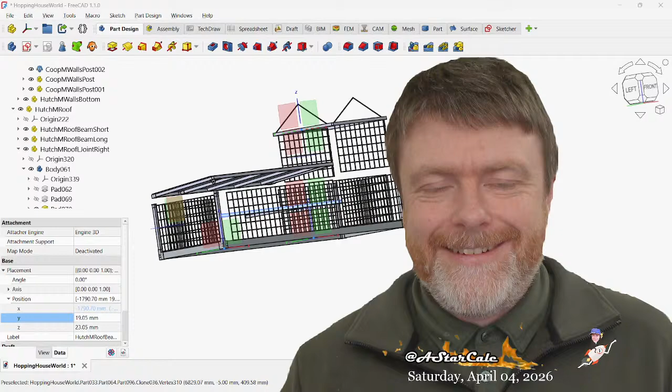My name is Cale, and we're working on some 3D printed rabbit hutches and colonies using cheap chicken coops and pet playpen fences from Amazon, with some 3D printed corners, a corrugated roof, and some wood and stuff from the Home Depot.

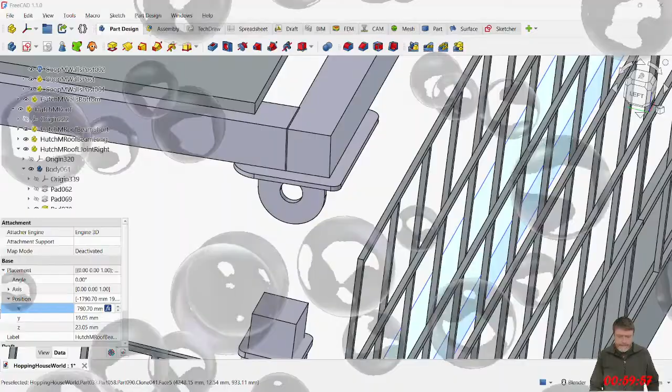All right, first off, I need to point you to where we're at. So that was not the right button. Oops.

GitHub.com/hoppinghouse/hoppinghouse world, and this is our mono repo. Doesn't really have a whole lot right now. It does have the design file, it's not all broken up yet.

Bookshelf. All right, so I need to make this thing not bozo.

So the hinge pad, I think it's right here. And then what do we need to do? Get the top down, going down, right here, right here. And then that doesn't look right. So I need to have this be... well, first the corners need to get... okay.

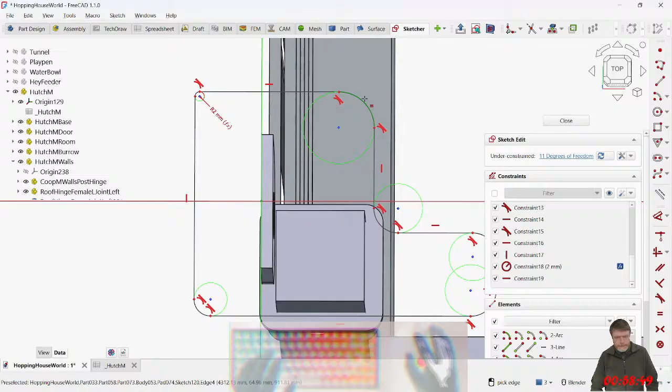Oh wait, hold on, no, I just need to do the equal. I need to move that in there for right now. Oh, get out of here.

Come on. Come on. There we go.

I don't know what to think about those new green circles. This is in FreeCAD 1.1. I don't hate them. I think it shows better what's going on, that's probably why it's there. I don't know why it's necessary though, or why it's a good idea. Maybe other CAD programs have them.

All right, sweet. So now I have to take this, this needs to be centered over here. Then I need to take this. So it's width, like a post width or something. Walls post width plus 2 times the hutch plastic wall thickness.

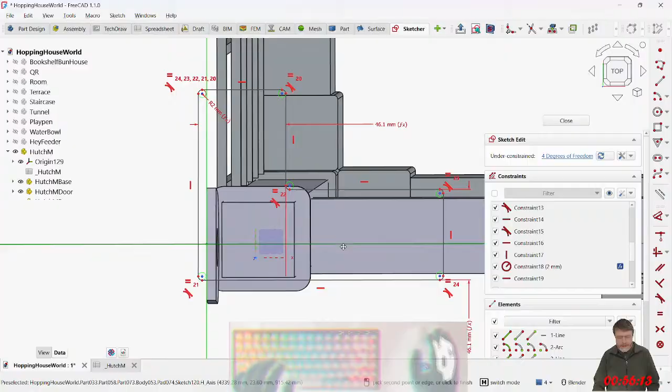What is this right here? This is an insert length right here, I think. Joint insert length. I'm gonna move this insert length. We're just gonna have it be... so let me explain my organizational style here.

So apparently my document camera isn't working. Sorry, apparently my camera is froze. So now I have to figure out how to... okay, so K, which one's the document camera? M is supposed to be in. Sorry about that. And I also got this one. Oh, all the cameras went down. I hate that.

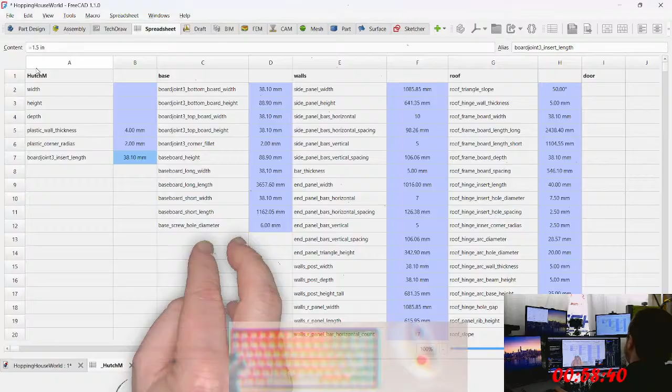Each of these things are like some sort of distinct feature or a different part in it. So this could all be one big giant body or a bunch of different split up bodies, and then these could be features. I think feature is just the best term, like this is one of the features of the model.

Just needs to say joint. If I renamed that one... nope. Maybe I should say plastic insert length. Plastic insert. Well, I'm gonna name it plastic, even though it's kind of a little bit non-descriptive.

But it's a little bit more modular. It just doesn't matter, I'm putting it there because you use these variables together, all three of these. So while it should say joint... I mean it could say joint on all three of them. Joint wall thickness, joint corner radius, joint insert length. Let's just do that, I'm just going to rename all these to joint because that makes sense. Plastic, I mean it doesn't really have to say plastic. What I'm saying is all the joints, they need to have as much.

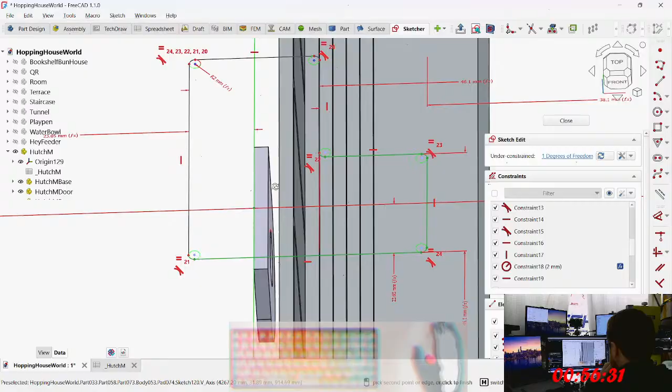And then I need some, like, along here, I'm going to need some little - what do you call it - like ribs or something, some supports.

So I think I need to take... what is it? Plus 0.5 times M thickness, hinge, arc, wall thickness. Roof, hinge, arc, wall thickness? I mean, the arc thing totally needs to go. Hinge, wall thickness.

All right, did that center it? That centered it. What else? We got one more degree of freedom. Probably going to be this one, right?

All right, now we're just going to make this the insert length. Wait, hold on. How does this insert length go? It's a square, right? So they're both the same? I don't know, just something - just blah blah blah, yada yada yada. Shit, wait, no.

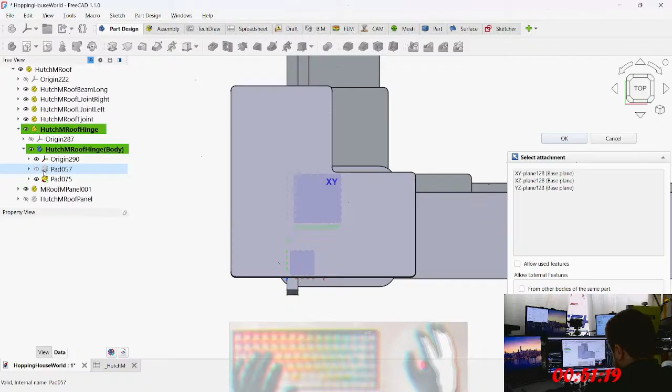Okay, so now we go to Part Design - or sorry, we're in the sketcher. Derpa, derpa, derpa, derpa. Damn it, all my buttons disappeared. What happened?

Anything else missing over here? Where's the... is everything that I need? I need - where's the construction lines right here?

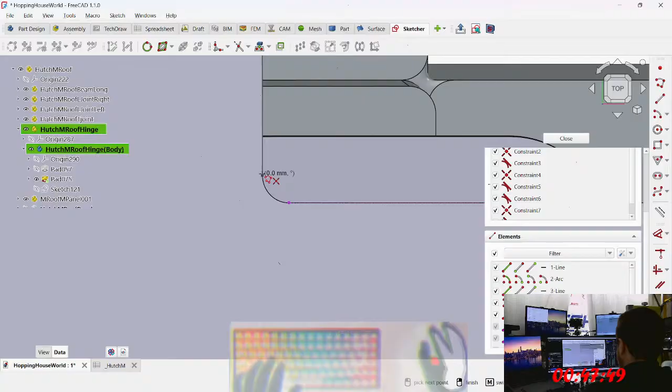So I'm doing some design for print right now. Well, I've already designed for it. So I guess maybe I'm not designing for print. Yeah, no, I think I'm still designing for print right now. So we got to make the, oh shoot.

Did I just mess up? Shoot. Oops. All right, so now that I got that right there, I need to get rid of the other one. And then I was supposed to make a wall. Wait, that's not it. So it was GN. No!

Those work. Huh? Why is there any arc? There shouldn't be any arc in here, right? What? Yeah, there should be only straight lines right now. So now I need to click on the right screen.

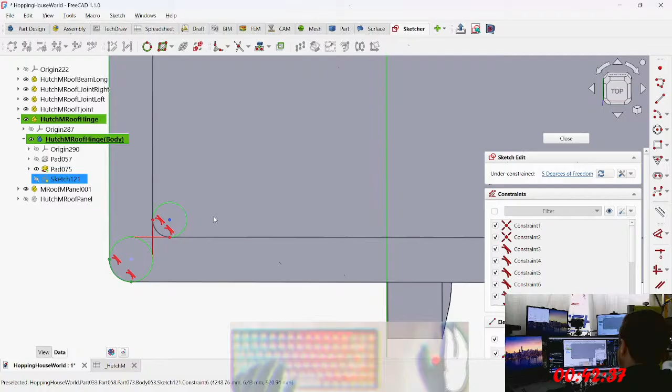All right, I don't really like this. Not sure what to say. So we need an inner corner radius and an outer corner radius. It's not really, for something like this, it's just so insignificant. It's not even really going to matter that much.

Really wish that they had a different way that they didn't use escape to get out of there, 'cause it's just so annoying. Damn it. Yeah, they need to use a different thing for that.

I just don't see that being a problem. It's not perfect, but just going for more of a squared off look on the outside, so it fits the design. All right, I'm going to do the other side.

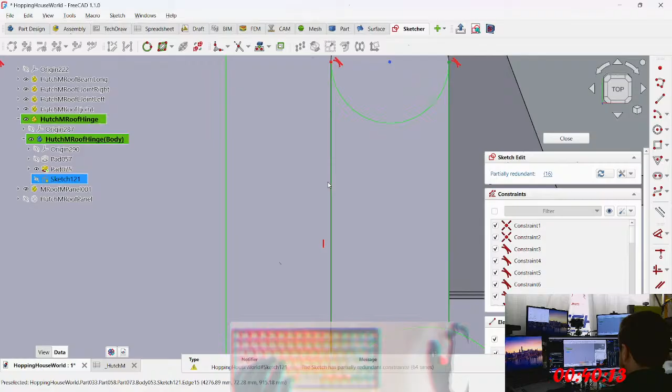I think I should be able to do two constraints at once. Joint wall thickness. Damn it. That wasn't what I wanted to do.

All right, partially constrained, 16. Oh, partially redundant. That's that one thing I was saying - should be able to do both constraints at once. Okay, so now we got the.

Is there anything else? Two degrees of freedom. Yeah, and then I'll snap it there. It'll be partially redundant. Oh wait, wasn't I trying to make it... how was I doing it before? Wasn't I trying to make it tangent to there? Or is it, do I connect them?

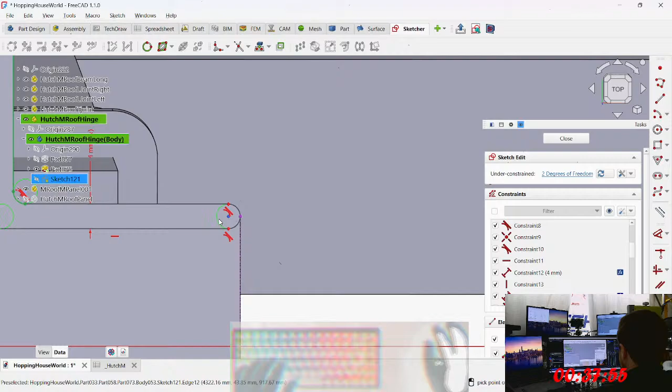Never have any errors - something I learned in C++. Any sort of error, any sort of complaint, any sort of warning, probably not a good idea. If it's not perfect, then you're going to have a lot of other problems down the line. It's just something that's 2 degrees.

Oh, there it is. Partially redundant - what was that? 33. Wait, so that worked? Two degrees of freedom, what the hell?

I think I have an extra tangent in there. Partially redundant - with what? That's stupid.

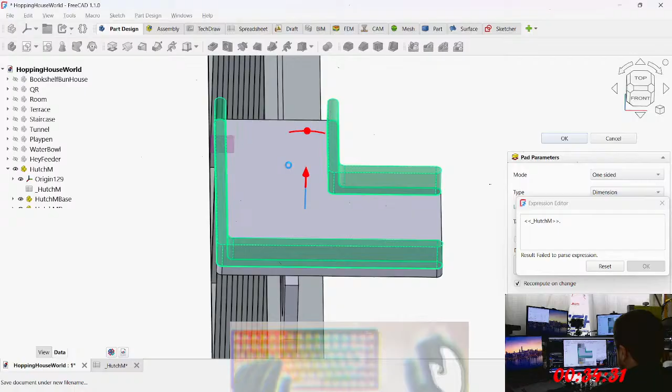All right, so now that it says Hutch M, now I can get rid of all of this other stuff. Wait, no, I can't get rid of the room. I can get rid of... man, that thing is so annoying.

All right, now that's off. All right, well, it's so annoying when that thing goes off. So what do I need to do? Is it something about the roof? It has to be roof.

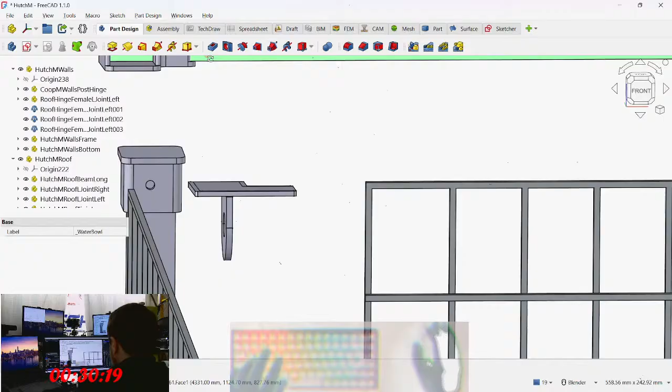I gotta go pad that out again because I accidentally pressed escape too many times. Oh yeah, wasn't I gonna programmably make it work right? So how do I programmably make this thing work right?

Hutch M. It's for the roof, and then board. Why would I want to make it programmably different? I mean, I could just make the board.

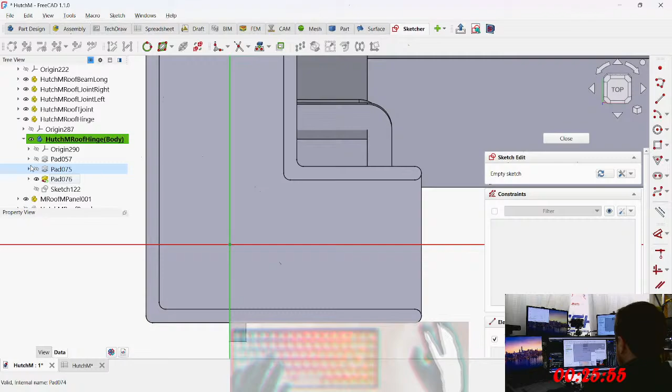I'm going to paste that in like I'm a pasty white boy. Right? Oh, it's fully constrained. Yay! I think last time I did this, before the FreeCAD 1.1 update, it did not paste correctly. So I'm going to have to say FreeCAD 1.1 is a lot better than FreeCAD 1.1 RC3. They really busted a move and polished that up, man.

All right, and then we pad it out. Wait, yeah - thickness, joint wall thickness. There we go, whoop whoop. All right, now we got to make the kickstand. Getting good progress, I am happy with the progress. I'm going to go to the bathroom real quick.

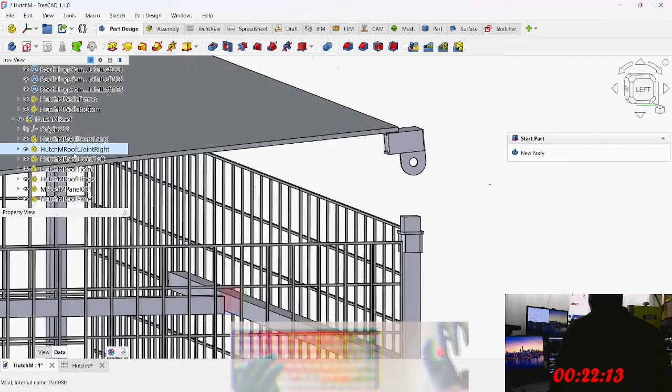So, this thing is the frame. Oh, get out of here. Where'd the frame go?

Oh, all right, there we go. So this thing needs to get moved into place. I could just unslant the roof so it's a little easier for me to see, but I don't think it really matters if I unslant the roof. That one seems to be okay. So I think it's probably just off by half. Yeah, it just needs to get moved over.

The hinge. Going to the placement, it's going to be the Y. Board length short, plus 0.5 times something, roof board, it's going to be the depth. Frame. That'll do it. No! Oh, because there was a minus on the first one, huh? Okay, messed that up.

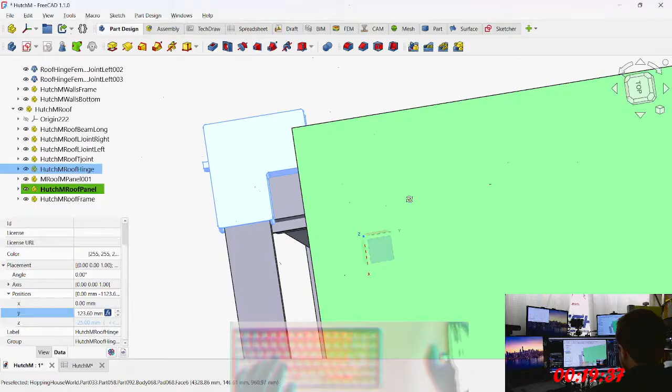What the hell? That's ridiculous. Units mismatch? Get out of here. Oh, times. There we go. Now it's right where it's supposed to be. I like that. I like that.

This, I mean, clearly I'm going to have to do something with some little fins along here. So the next one is going to have to be... I'm getting tired of having to do these. I've had to do a bunch of them.

And my son messed this one up. He was supposed to do this, and then, let's look at the T-joint. What happened here? Did he... oh, he just cloned it? What the hell is that? Wait, that doesn't make any sense. Boy, he really doesn't know what he's doing. Oh my god. Uh, he's creative though. I mean, he's 17, I'm not dogging on him too much, dude. I appreciate it, I mean, yeah, it was there. It was just kind of like, what the hell was that?

Okay, all right. So I need to take that and then make a clone of that for right here, and then right here, and right here. Luckily, I'm not going to have to come up with another piece. And then also, this needs a plastic fin that goes right here.

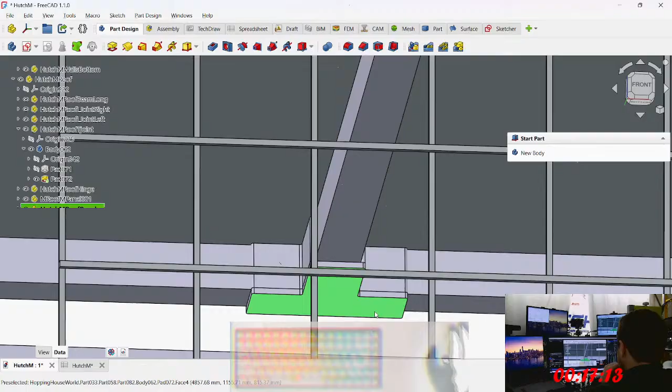Wait, is that going to be able to design for print? Maybe I don't need it. It is going to be difficult to get to print that, to put a fin right here, because this is where the PEI plate's going to be, and then it's just going to print up that way. And so this thing is designed with these curves right here so that it can print as fast as possible, so it doesn't have any right angles.

That's probably fine, I don't think it's going to be bending. And if it does, I mean, that would prevent it from bending. Just this, I think just a screw right here. All right, well, I don't really want to have to deal with it. I'm happy enough with that to where it's totally not a high priority to try to tweak.

So the baseboard for the walls needs to come up. So the wall frame needs to get detail. And where's the? There it is. Take that, and why is that like that?

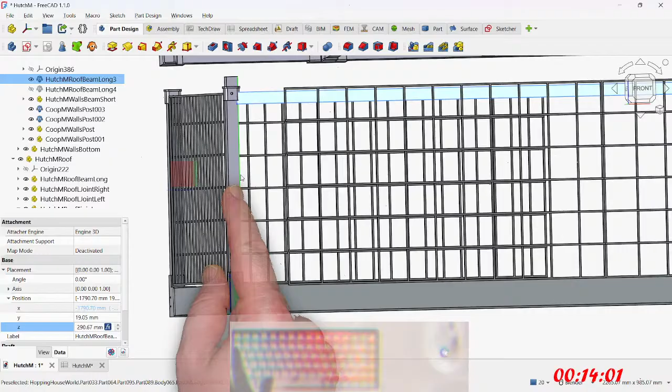Getting the symmetry right with these 3D models is pretty challenging. It's like there's no one-size-fits-all rule. Different things are annoying in different contexts.

So, what's the... huh, probably just delete that. 2 inches. Call it good. It won't be very parametric, but that looks to be good, right?

Okay, so then I need a joint for that. And once I make the joint for that, man, I'm gonna be looking good. Yeah, that's looking good. It's looking good.

All right, so next is the design for print. Where is the design for print coming up on this? With this particular design, it was way easier for me to do this thing first, because it's oriented differently. It's got a round thing on it.

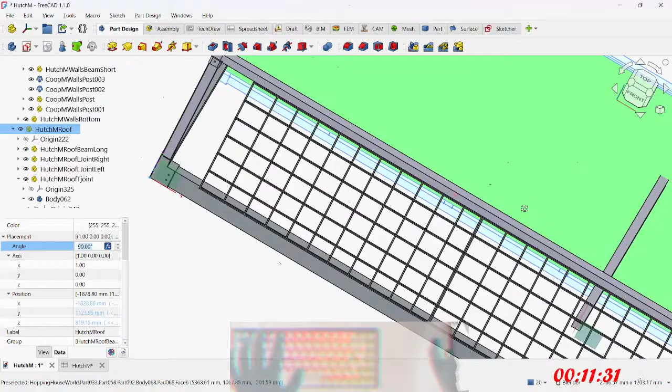What? That's not right. What do I need, like 270 or something? Or negative 90? Damn it, that is so annoying. Negative 90. There's up all the way.

No. So what is this hinge on the wrong side? Oh, the whole model is oriented wrong, huh?

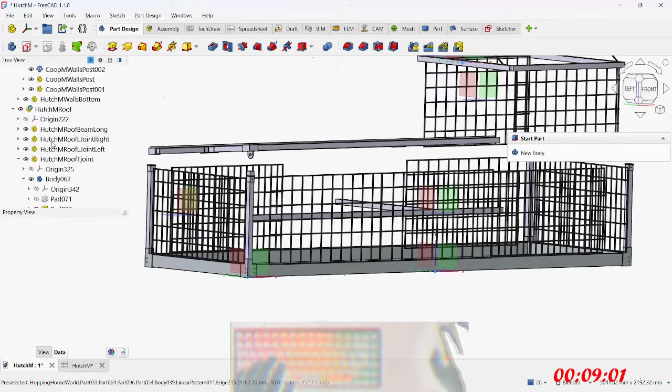That is so frustrating that this thing came undone.

Where's the other post? There's that one. I wonder if I could put that one into place. I wonder, huh. Better be able to put that one into place.

OBS doesn't freak out. OBS is glitching. Well, here goes OBS. It's working, but it's totally glitched out. OBS has been a total POS for a while.

It's borderline unusable. Pretty much for me, it's like most professionals would say it's completely unusable. Been that way for a while, been that way for months. Just glitches, pauses, stalls up, freezes up completely out of the blue. It's not a memory leak. It seems like some memory leak, but I have no clue if it's like my scene set is too complicated, or if something's glitched out in the scene set and it's causing the other thing to glitch out.

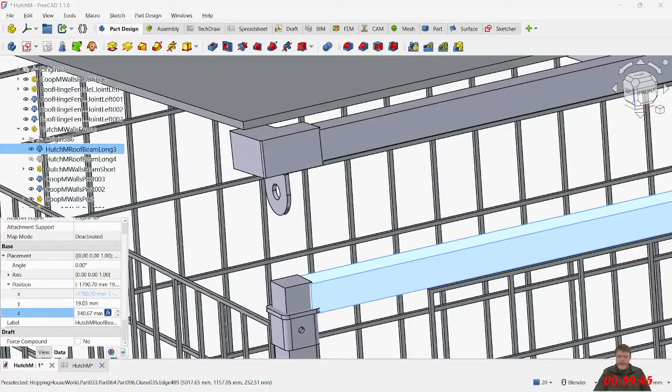I don't know why, but OBS just takes a dump every once in a while. It's like the worst.

All right, so I think I need to recreate this thing only with two, and then it'd be upside down, and then recreate and do the exact same thing that I did here, for here, and I'm gonna need this board, which I started to put into place before this thing took a dump on me.

So X needs to be 0.5 times, what was the baseboard long length. That went the other way. Baseboard short length, that's a Y. Okay.

See, get this from... Wait, no, it's height. Post height. Oh, get out of here. Tall, that's not it. It's not supposed to be it.

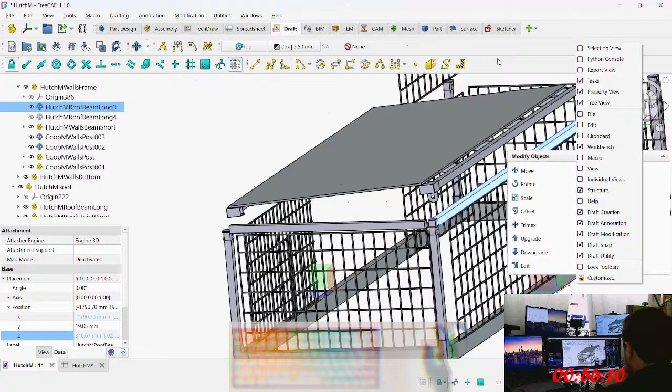All right, any of these need to go somewhere else. Where's the clone? Okay, it's missing the clone. Oh, I did not want to do that. There it is. Jesus.

Can that fit in there? Not really, but good enough. All right, that'll go there, and then this can go here. All right.

What is this? Text. That's good enough. Where's the clone? Oh shoot, still missing stuff. Maybe this thing can go down here. There it is.

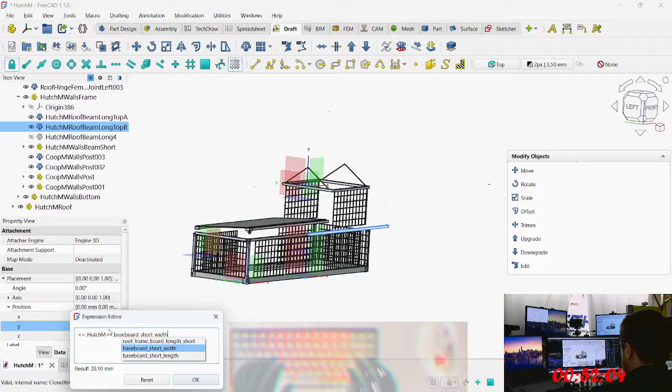Baseboard short? Maybe it shouldn't say baseboard short width. Word. That's the way it is. What the hell? The hell was that? No, it's length. Okay.

Now we gotta take the X. All right. Almost.

Now, what do I do? Address the... Wait, 6? That one. It's good enough, for the most part. What is that? That's kind of... That doesn't look like. That looks right, right there, definitely for sure. That looks like it's in line. And then...

It doesn't really look like it's in line. That looks like it's right. That looks like it's right. It doesn't look like the... Oh, it's half of a thing off. Okay. Right? Well, I don't know. Well, this one's off too. It's in the Y.

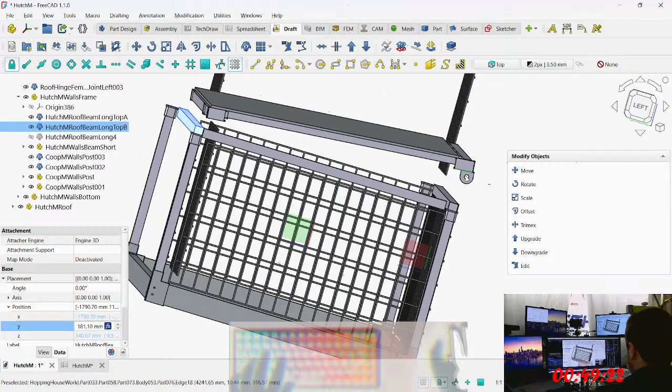Which is going to be a little bit difficult with these joints because we got the, what do you even call it? Yeah, this joint right here. So what needs to happen, I think I need one just like I made on the bottom here, with a 2x2 up top. I had this joint. I don't know what I was thinking exactly with that joint.

Makes you wonder if I was smoking a joint or something. No.

No, I think I had originally designed it to be so the post on the back stuck up a little bit. Well, I had that 2x4 on the top. Then I determined it was too heavy. But then the problem with that is that this, it's a little bit less sturdy. I mean, it's not like people are moving it around very often.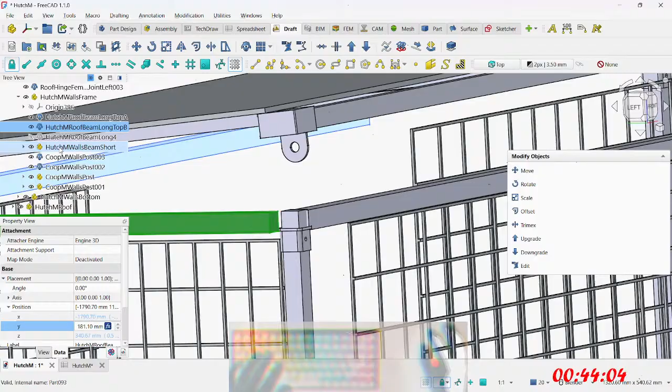Frame. What am I looking for? The roof hinge? That's not it.

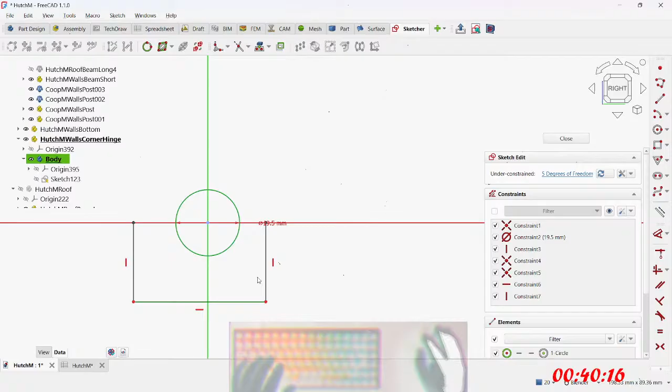Oh, isn't this faked? That's not even it, I can just delete that then, huh? So what do I do? Get rid of that. Make this equal.

About a hand. What is it, arc, wall thickness, hole diameter. Diameter, be my arc base height.

Arc beam, what the heck is an arc beam? Insert space, like off. I'll just make it like that.

Okay. GM. The shit. All right, what do I do, do I make it symmetrical? You go back to the other one. Base height? That's kind of weird. I don't know a better way to describe that though, so it is what it is.

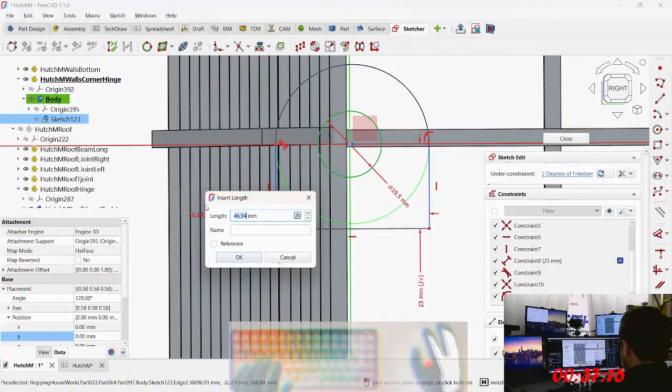Oh yeah, baby. Wait, what do I hinge? Hinge, what is it, base. Wait, isn't it like 2 times the diameter? No, it's 2 times the radius, right? So it's some sort of radius, the hinge inner corner radius, inner hinge. I mean, it seems like it would have to be 2 times that.

What? I want my money back. I guess I should just go get the parameter from the other one.

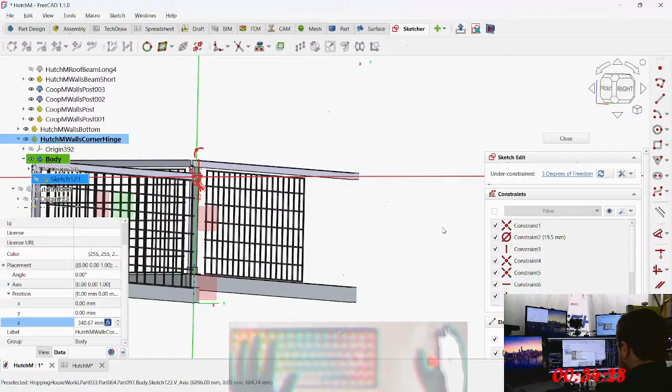Oh, I'm not sure if I'm doing that. What's happening? Oh, because that's not the right one. Okay. What the hell? What just happened? Why is that gone? What the hell?

Wall thickness, not really wall. Okay, where to go? There.

Okay, so I need to take the X and shift it over. 0.5 is probably negative, probably, and then because it's on the left hand side from the looking at the front angle, times, and then some sort of length.

You got to pay attention to how I'm naming my variables because I'm very good at that. It's pretty easy, but you got to remember. I can't remember all these variable names, right? So like, what's the search term? And this one's the short, the long. Oh, bada bing, bada boom, azuma zuma.

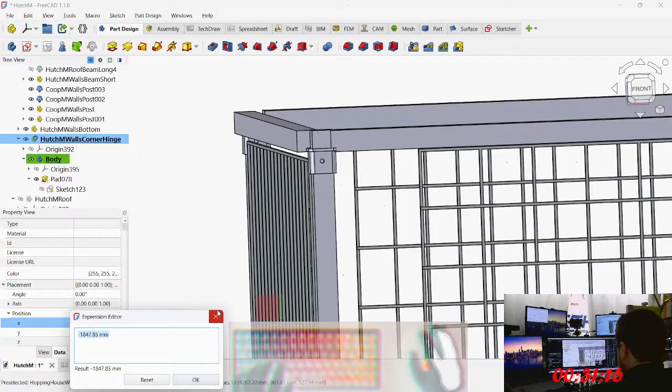What the hell happened with that? Well, that's just about fucking irritating. Not the biggest deal, but yeah, irritating.

And the Z. Oh, well, no, it's not half of that, sorry. Do I have to add a wall thickness on there? 2 times wall thickness? Jeez.

Joint. Oh, there we go. Oh, it's 3, huh? I was not expecting that. But I probably had another one that needed to be offset.

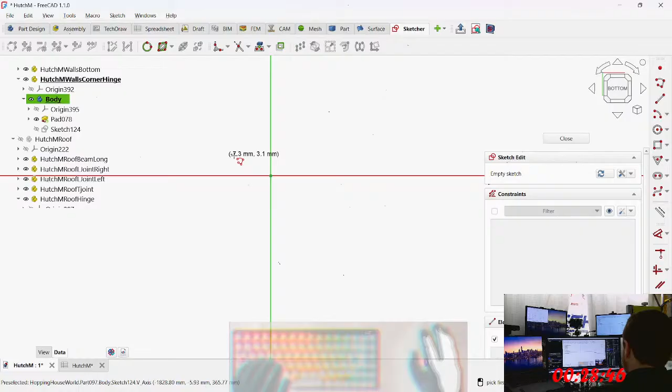Oh, there it is. Uh-oh. So what do I do? What, just like, wait.

I gotta figure out which way is up. Roof hinge wall thickness. Wall thickness, all right.

No! You accidentally pressed the wrong button. Oh, I wish I had done... What happened? My FreeCAD's froze. All right, I'm gonna exit out of that. It has completely glitched out.

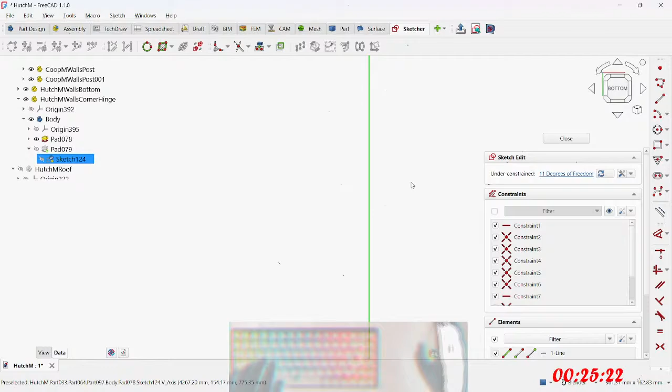Okay, so the short side is pointed, the longer side is pointed the direction that I need the joint to go. So this is pointing the direction of the board.

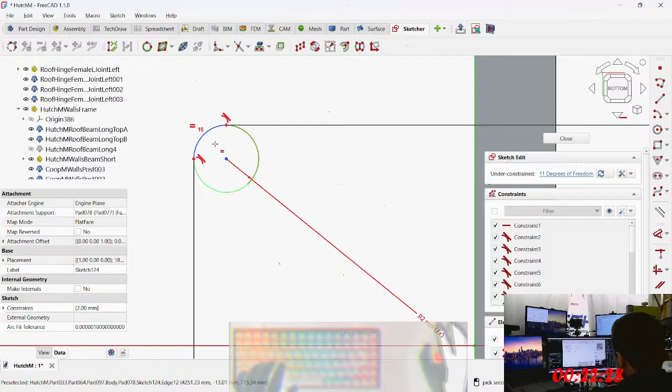Hate that. I wish there was a different button to exit the sketch than escape, like maybe shift-escape or something, or maybe escape one time instead of pressing it multiple times in a row because the UI is not responding correctly.

I think I should be the dictator of the world, and I'll make everything perfect. This time communism will be different. This time it'll be like a hybrid of capitalism and communism. I'm joking, I'm joking, this is a joke. So many people would fall for that.

Yeah, I'm anti-communist, I'm anti-authoritarian, so that definitely makes me anti-fascist. I don't think the fascists were authoritarians though, because I've done a lot of study on them, and it doesn't appear like what people are saying matches what they are. They're being painted as demons, like the Germans in World War II, as if they're default bad just because they're fascist, and that's why they were bad. But that's not the truth. No, they were actually good people who thought they were going to help the world. They went down the slippery slope to hell that is paved with good intentions. Once you understand that, you're like, oh, so that's what happened. Yeah, trying to make the world perfect, huh? Yeah, avoid that one. Better to learn from other people's mistakes there. I mean, I want the world to be perfect too, right? But it's like with war: do you want no one to die, or do you want fewer people to die? Because you can't have both.

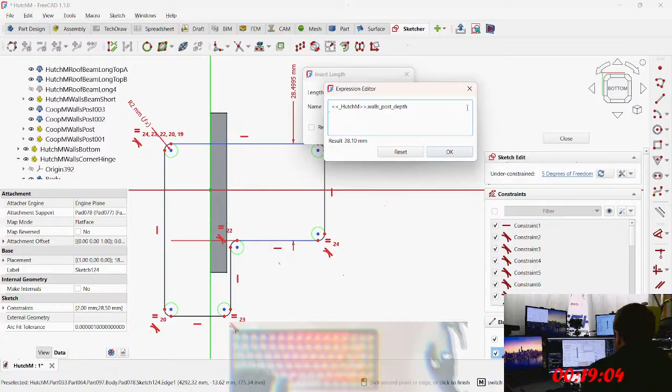I really should just have one 2x4. It's kind of pissing me off, but it's not horrible. It's just a couple little things to program so you could change the board width and the height, but it's a wee bit complicated. I don't really particularly want that added complication, to be 100, and then plus 2 times the thickness.

All right, that's it, baby. And then we're going to do the same thing. Depth, is that the right one? 46 inches, that's not right. Or 46 millimeters, that's not right.

Post depth. Post depth. Isn't this something on a post, right? That's a depth. But 40 - so wall thickness is what, 4 millimeters? So that should be like 38 or something. But this is 46, that's not right.

But the post depth, why isn't that... wait, hold on, I'm tripping. 25.4 times 1.5 is 38.1 plus - didn't I say it was 4 millimeters plus 8? That's 46.1. Okay, I'm just tripping.

Next, we'll take this over here. Then we'll take this. No, gotta go here to here. This is hutch insert length, joint insert length, yeah. And then this is this. I've done this a whole bunch of times at this point in time.

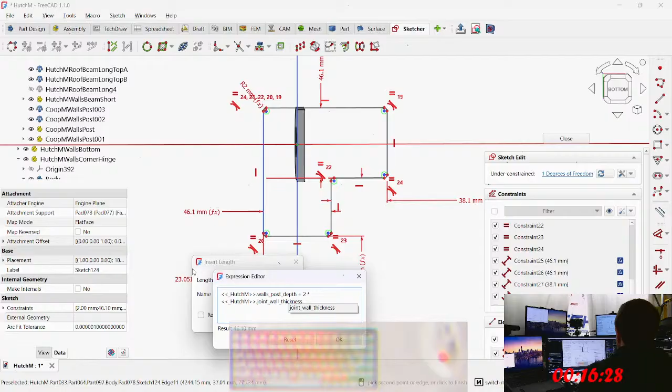I'm gonna have to do a whole bunch more, which I'm not sure if that's how I want to be designing this thing, but there's certain things that are a pain in the butt, and making the same thing over and over again is definitely one of them. But then I should be looking at automation. Some things though, it's just easier to do the work because I don't really see myself changing this design in the future, so it doesn't really matter if I program it to be perfect or whatever.

This is 0.5. And then here we got this. What else we got? Fully constrained - it's about the most fully constrained you'll see me. I should probably make this base thing like the full width of this. All right, well it ain't pretty right now, but it's good enough to build the other piece off of.

It's the same shit, different day with that. So you enable the construction geometry, the projection. Do I need this? I think I need that one. Get out of construction geometry mode before I start pounding down construction geometry here.

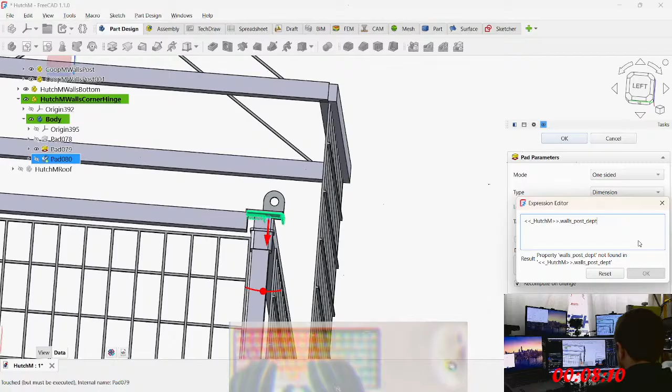Roof, frame, board, width. What, isn't it a post? Kind of don't like how I have a different thing for the thing. Post, wait, right? No, this is the depth. Wait, no, it's width. Okay.

Bada bing and a bada boom. Right, not out of Kansas yet. I need to get rid of that old hinge. I think I'm just going to delete it because... uh.

So I'm still going to get a little bit of a slant out of the roof. I mean, how much slant do you need on a roof? Like a couple inches? One inch? Two inches? I don't know what to say about that one, dude.

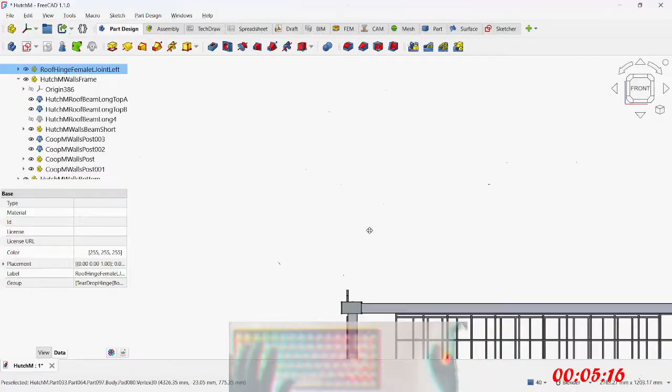Almost there, I just need the base. I need to get the thing to be aligned correctly. All right, so I need to go back to that.

Unfortunately, I'm going to have to make another T-hinge for the other ones because I'm going to need some post over here. I'm not too happy about the post I need, or having to make the extra T joint hinge. This is what am I gonna call this? Like an L joint? What is this called? Is this like a... So this is an L joint, and then when there's one that goes this way, is that a jack hinge?

You know, like a jacks. I don't know. All I can tell you is this corner hinge is out of place. Position, it's going to be an X minus.

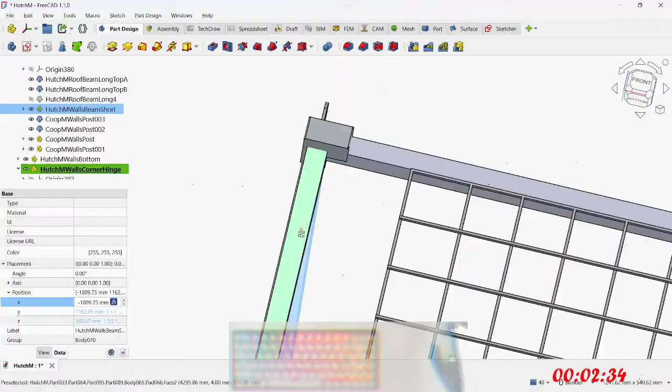All right, now that that's in there, now the hinges. The Y is what? What is the problem with this one? Is it half of a? This is a Y, I think.

0.5 times post depth. Boom! Right there. Might be off by a wall thickness. No, that's exact, right, that's exactly what I want. Right there. So now I'll go over to the...

This. All right, so this one needs to have the... so when we do take the, no, we need sketcher. Need some construction geometry. We're going to do a projection over here.

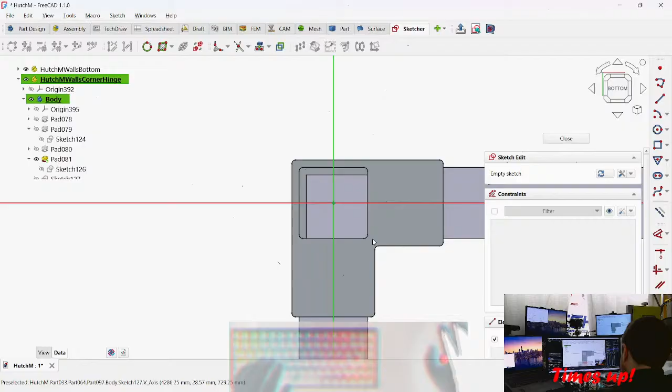Geometry. That mode and then GM. Gotta do another one. That... didn't do this.

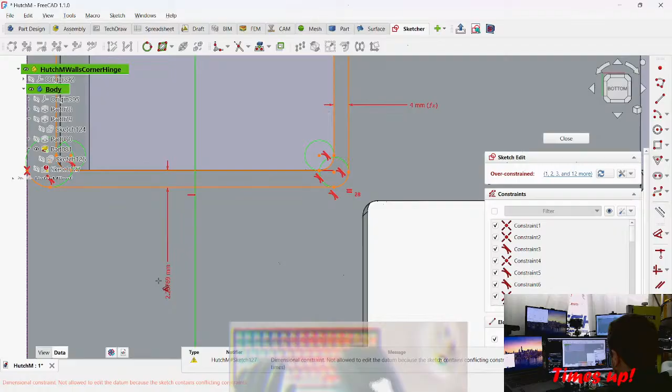One. It's just the one now. Can I just make it vertical and it constrains itself? Solver failed to converge.

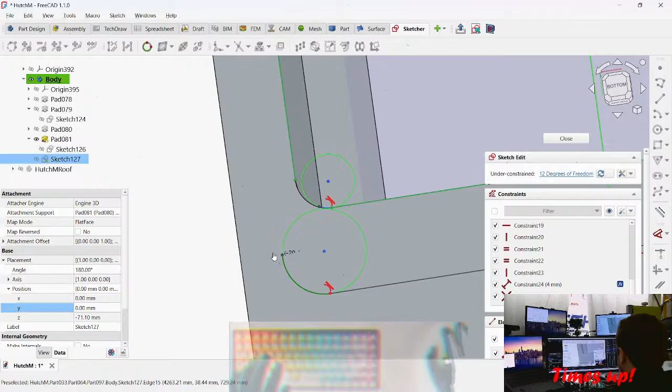Whee! Is there like an extra piece there? I don't see the construction geometry. Wait.

It's not right. I can't tell if I have a... so I don't have a thing there, huh? So I need to go. I don't see the dot. Why are there two circles here?

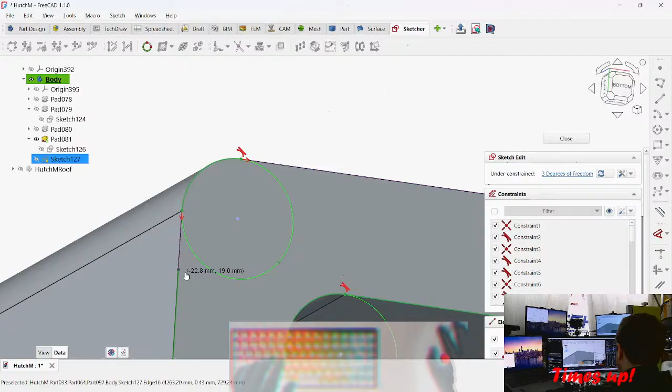Really getting tired of this thing. Doing the tool. Press the button more. Still a little bit glitchy, that's for sure.

I need to delete it because it just doesn't... it's not complying. What is that? Leave the whole line, start over again.

Damn it. I really hate it when it does that.

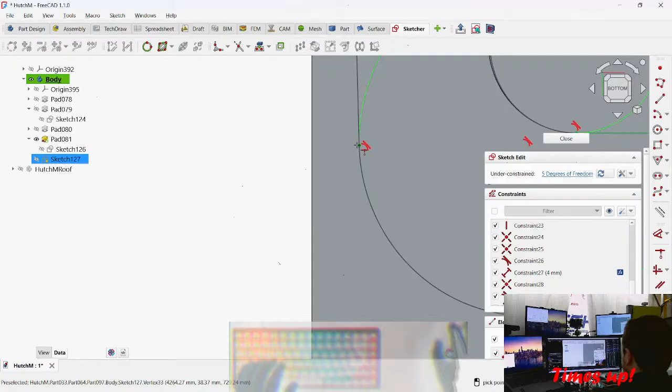Why does it have to get out of the... so frustrating. It's like the most frustrating thing in FreeCAD. Yeah, it's me.

Did the construction geometry disappear? Like, what's going on?

Come on. Here we go. What the hell? Now this thing is whack. It's not actually tangent.

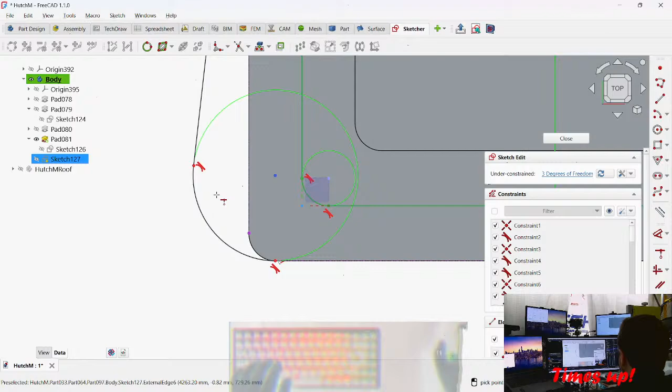2 degrees of freedom.

What's this? Fully constrained. Right. Does it work? Damn it. Son of a bitch.

Something's not connected. So maybe this corner wasn't connected. Uh, maybe I needed this. Degree of freedom.

Why isn't that green? That's really just irritating. What you gotta do? 2 degrees of freedom. What happened? What the hell?

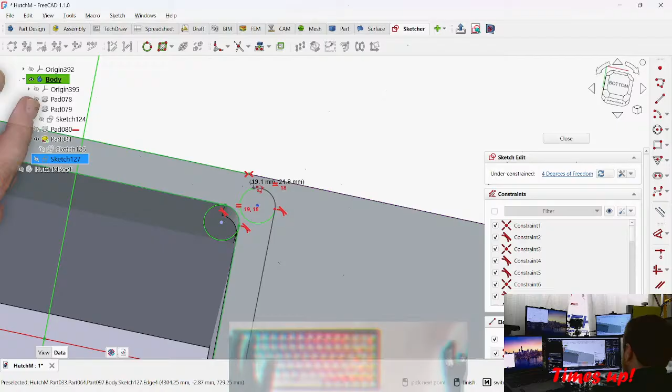Make a tangent. One degree of freedom. So close.

Over constrained. Under constrained. This. So, okay. Why is this like this?

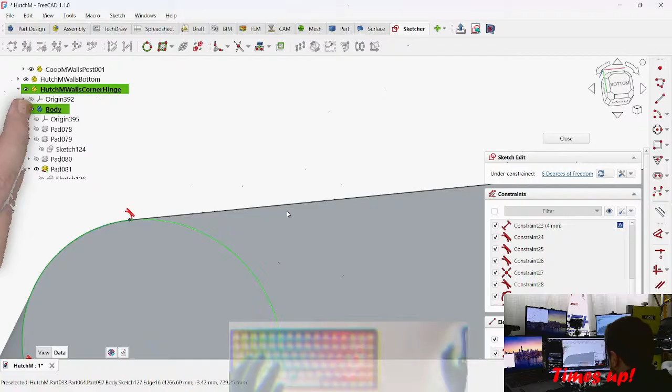So annoying. Okay, that's not it. Is that even a line? It doesn't even look like a line. Is it a construction line? I'm just gonna redo that line.

It'd be terribly frustrating to line these things. Maybe I could make this tangent here. Can I make this tangent here?

Oh, get out of here. Why? That's so freaking annoying. The hell is this?

I have no clue what this stupid thing is. Why is this connected here?

That's not tangent. What happened here? Why is this back? Oh, because that's the wall thickness, right? It's just a glitch. Okay, that maybe looks a little bit better for right now.

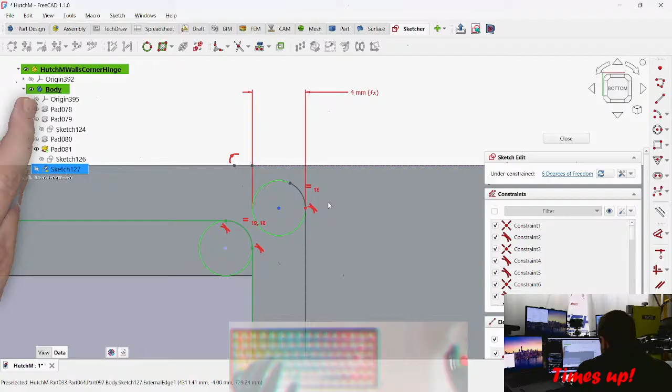It is so frustrating to tie this up. Oh my gosh, jeez. Is it because of the equal? I think it's maybe because I have the radius. Like I'm seeing that there's the equal sign here. Look, yeah, that thing, get rid of that. Yeah, okay.

There we go. All right, still 6 degrees of freedom though. Where the hell are the rest of them? I just wish that they weren't like... why is this one green and this one's black? Better not be construction geometry.

Wonder if I can pad it though. No, I just can't see where the... what is missing here in the sketch? It's so hard for me to see anything.

But I mean, why is this line black? All these other ones are green. Why? It's not a construction line, is it?

Oh, is it because this thing isn't closed? Maybe that was it. Or maybe it just needs to be fully constrained. I despise that.

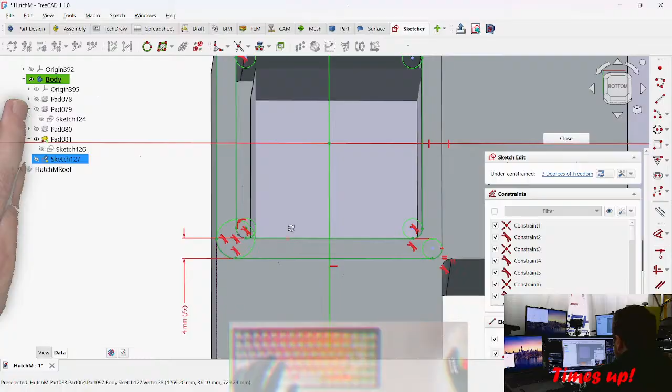And it glitches out, and then you have to press escape to get out of whatever the hell mode it's in, and then it kicks you out of the sketch. It's just so frustrating. First off, why is it green though?

Come on. Okay, come on. Get the fuck out of here. I have no idea what I just did.

Here it is. This thing is supposed to be... what's that tangent to, if that's not? So that must be... supposed to be like that.

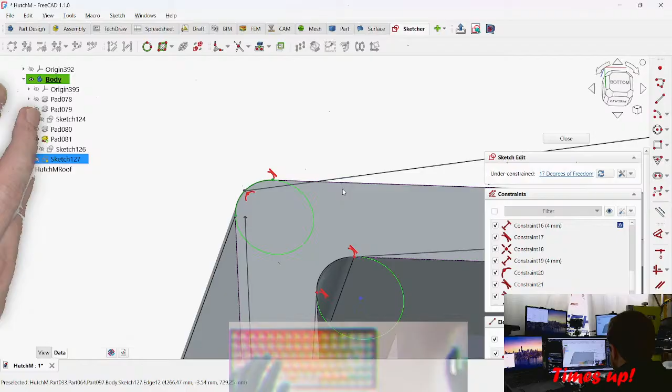Oh man, that was so frustrating. That's not tangent. That is not tangent at all. First off, this thing isn't tangent either. That's because that thing's stuck on there.

That's not tangent. Okay, horizontal. And that thing's tangent over there. Woo! So many problems with this.

Everything's all snapped the wrong place. It needs to snap to itself first. Maybe the... this isn't really... Okay, what's snapped? Stupid snap thing. Tangents.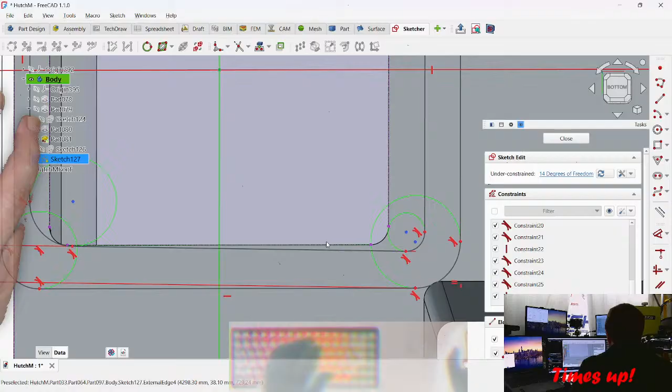Is there anything redundant or under constrained? Why is that all whack? No, why is that like that? It's not supposed to be like that. There we go.

Can I pad this? I think I can pad it. Yay! All right, so what is it? Insert joint. Insert. Yay! There it is.

It's right there, you just gotta snap it. It's all whack right now. I just gotta snap it up. All right, snap this baby. It's just the perspective is so weird. What's going on with this perspective? Hold on, do we have a glitch under there?

I think it's supposed to be... oh my god, it's so annoying when it does that.

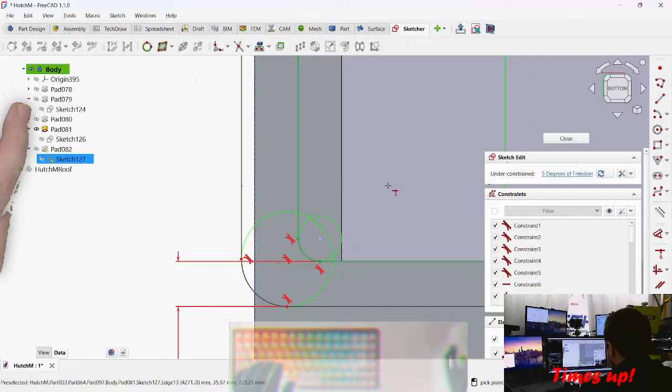No, no. That might constrain the whole thing. Yeah, oh, partially redundant. F you. You're partially redundant, nothing but a chat bot.

Under constraint. Yay, yay. Now we just snip over here. Snip, sprinkle and pop, baby.

And now the wall thickness. Wait, redundant constraint. What do we get? Huh? Under constrained by one?

What the hell did I do? What do we need? The corner's going to be...

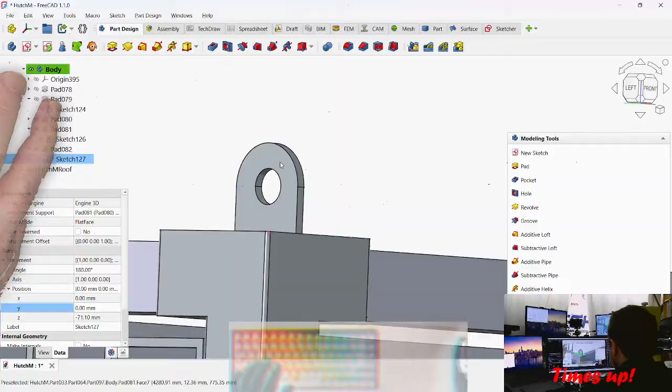What do we need to do? Take that. Make a new sketch based off of that. We go to the first one. Can't see, my hand's in the way.

Just got to go over here and then copy and paste all out of here. Three degrees of freedom. That's not right. Shit, son, still got three degrees of freedom. Whoa, shit, son.

Something about the arc radius. Arc diameter. What? Okay, well, I don't have to have this perfect to get it. That's probably why I went on with the other one.

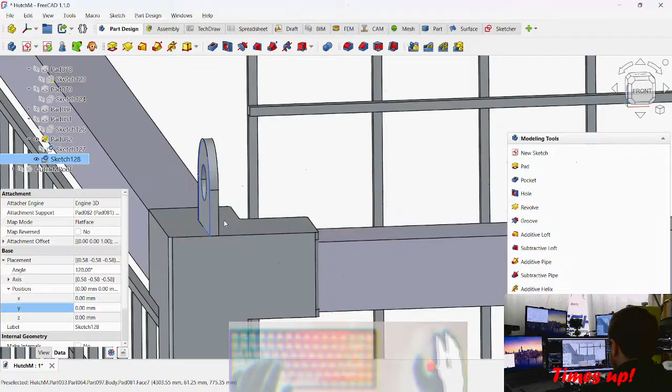Where'd he go? And then what happened here? Hey, what happened to this? Glitched out?

What is this thing need to be like some sort of offset? Does that even make sense for a sketch? What do I need, to pad it out the other side or something? Like a reverse pad?

Okay, so that step's fine. Uh-oh. What happened? Did I break the whole thing?

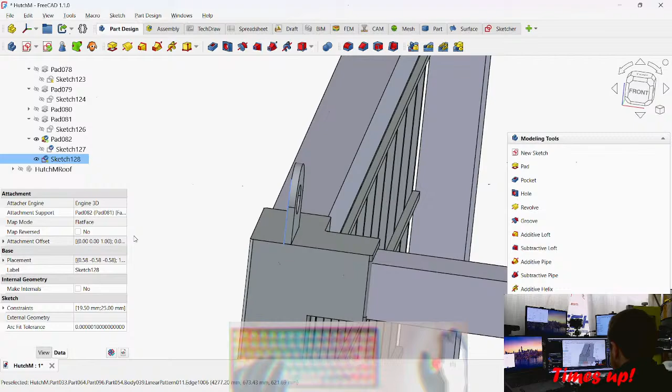So I need to offset this sketch so it's not on the same plane. Well, really, I should be able to just pad it with the reverse pad. Right, that should just work just like that, but...

Boy, I hope all my design work just didn't get destroyed with this. Uh-oh. Well, that kind of sucks.